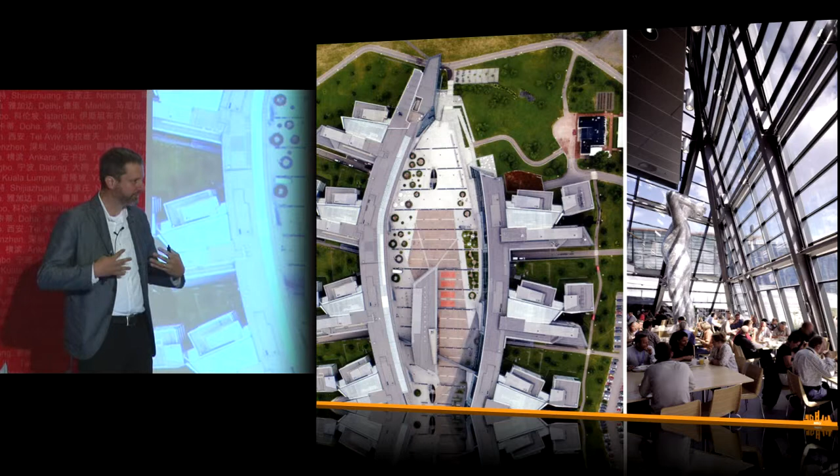This is another, which is actually mostly a research facility. And I show this simply because there was an idea of delaminating the program to even further compel people to interact. And researchers are hard folks to kind of get off of their desks or their cubicles or their screens to actually talk to one another. So we created a strategy, which I'll show you developed further in a high-rise, of basically pulling out all of the shared functions out of the building.

And the building on the left up there is the new one, on the right's the old one. Pulling out, this is in the UK, pulling out all the shared functions and putting them on the other side of a plaza and forcing people from the old building to the new building to cross that plaza to go have lunch, to have a conference, to work out, to simply hang out and to meet.

And what it's done, now that the building's in operation, is it has actually created this great sense of community interaction. So I just show those as examples of testing this idea of sort of magnetization and delamination of program to create sort of urban-like interaction. Just a few views of some of these zones in the seams between those delaminations where that sort of interaction starts to happen.

So now taking that idea and moving vertical, and I could talk about other points on the low rises, but to keep things moving along, the vertical. So the vertical city. This is a study we did also maybe 10 years ago, just thinking about the vertical city. We were hired to create a sort of mile-high tower before Adrian's and others have actually been built.

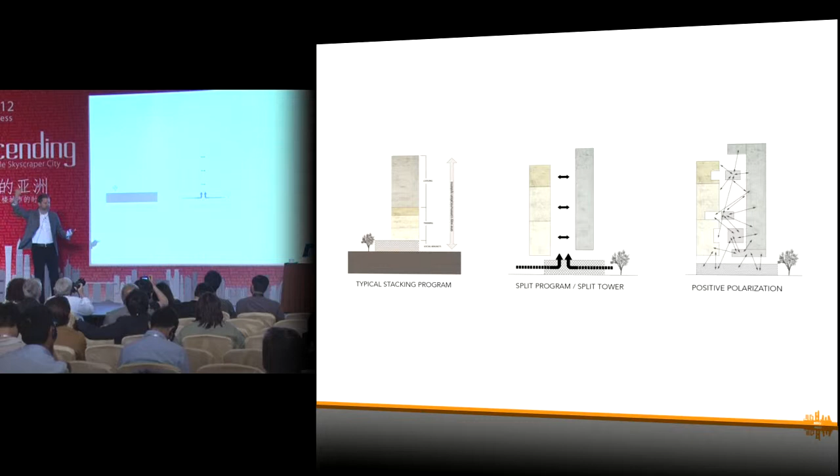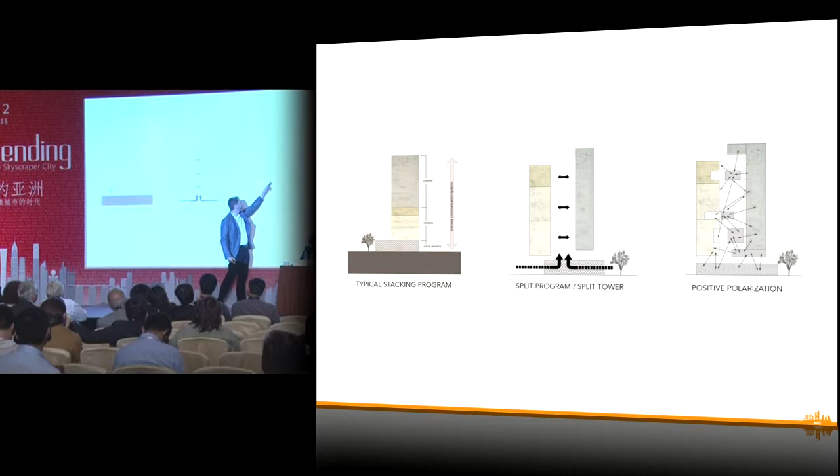So we took the ideas I showed you earlier, we split this thing apart, delaminated it this way, put the classrooms here, the dormitories there, and we kept the shared functions here, being practical people about getting goods and services and getting lots of people to move through. But then we took some of that stuff and we tossed it back up in between those two pieces. So those become these social magnets, similar to that Wellcome Trust project, but now it's vertical.

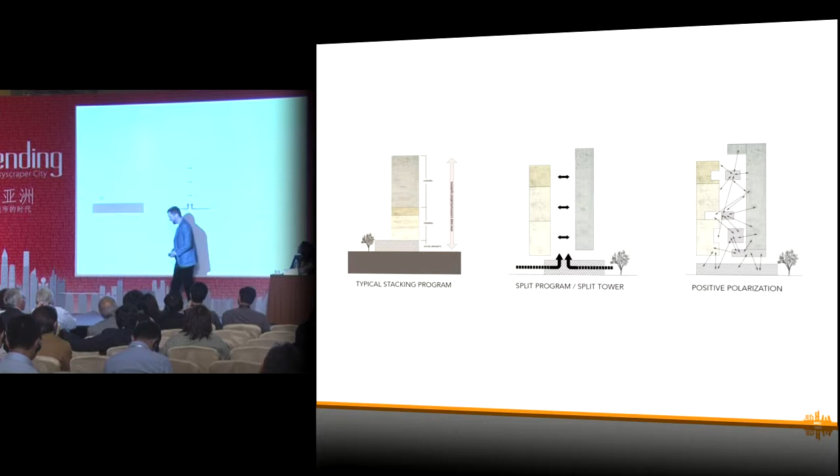So we've taken things that are all shared by the dormitories and the classrooms, and we've put them at junction points vertically in this tower. And that sort of positive polarization, in theory, because the building wasn't built, starts to create some sort of vertical urbanity to the project. And the idea of a vertical campus in a very dense situation where they didn't have the opportunity to go horizontal.

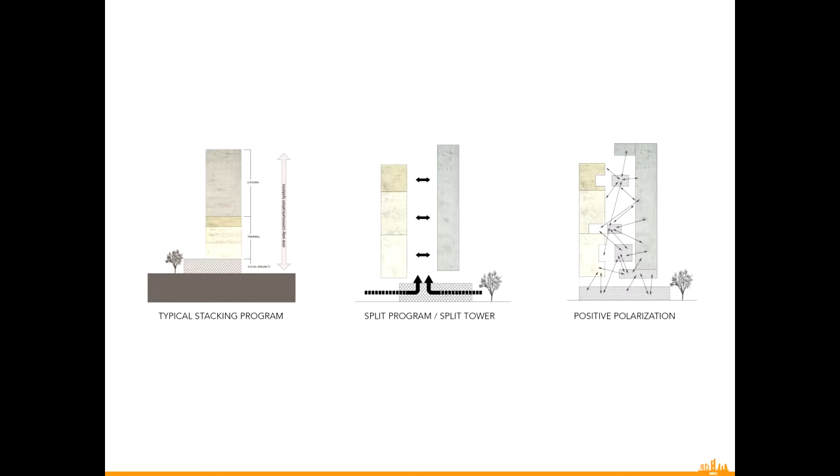This is more of just a quick sort of study on, it's a very beautiful building, a very simple building, on sort of user control and flexible systems. So taking the typical tower, it's just a box, a very beautiful, elegant box for NHN in Korea, the top search engine there. So typically you'd put the core in the middle and all the workplace around there. There's a lot of good reasons for doing that, and we do that a lot.

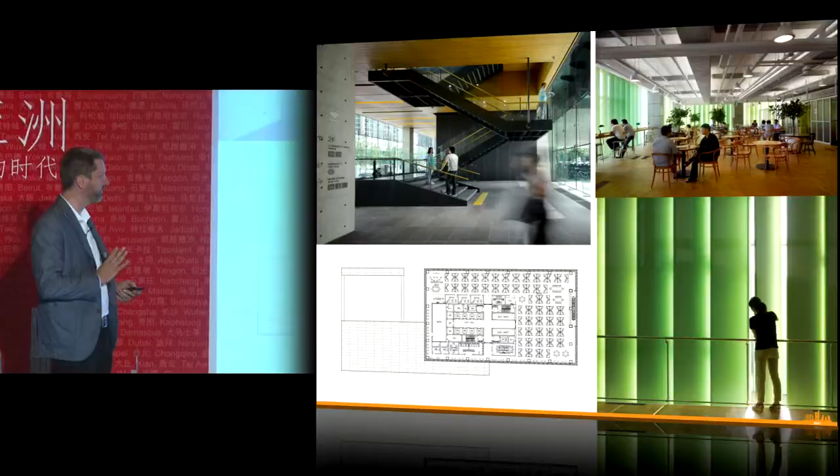And very simply, we just tried to, and this is done a million times as well, but we tried to move this off to the side, create 5-meter floor-to-floors on every level, and create a very flexible sort of warehouse-like space in the sky. Just testing ideas about flexible, adaptable systems. And that plugs into some of the ideas I talked about earlier. But at a very clean, kind of elementary level here, create beautiful architecture out of it. At the same time, though, creating user control.

So the entire facade of the building is wrapped by these green multicolored louvers that allows the programmers and the scripters and all the people who are creating their search engines to control daylight and control the expression of the building. So the expression of the building is talking about the people inside of it.

So moving on now to bigger projects. This is a headquarters for CHINATRUST Bank in Taipei. So here we, I think, tentatively push the ideas a little bit further of the delamination and the polarization of program to create the positive interaction. It's a headquarters tower. These two towers are both part of the headquarters and a hotel, and a retail podium at the base. It's on the edge of Taipei, looking back to Taipei 101. It's under construction, as you can see at the base.

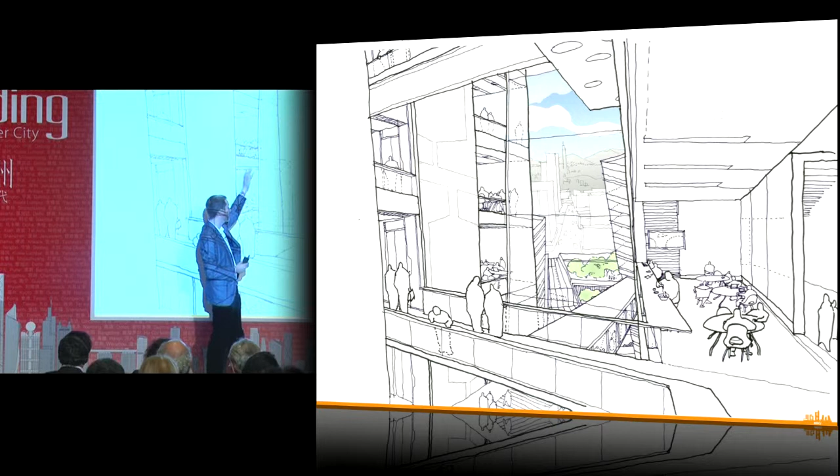Conceptually, we tried to create this experience. All these things that we accomplished at the low scale on Telenor and other projects, trying to fold that up vertically into a series of not just atriums for the sake of an atrium with some trees and some nice sky lobby situations, but actually these series of pocket parks almost that have cafes, that have meeting facilities, that have lobbies, that have different things. And we broke them into smaller chunks. But we just started to tentatively delaminate the building to create that kind of experience.

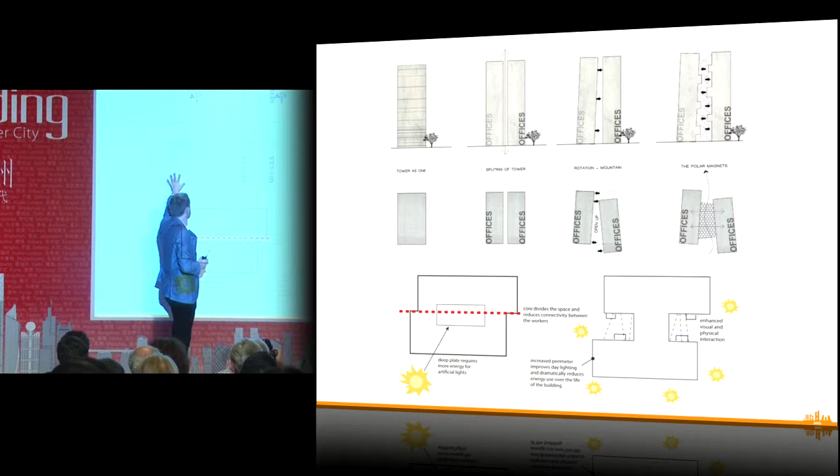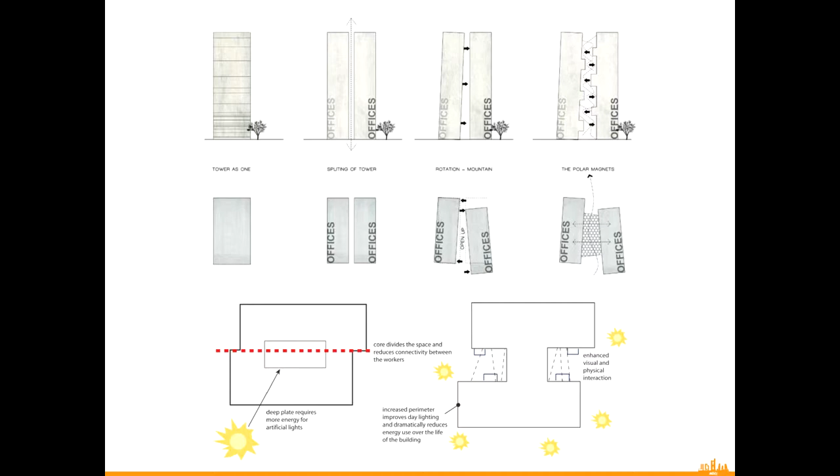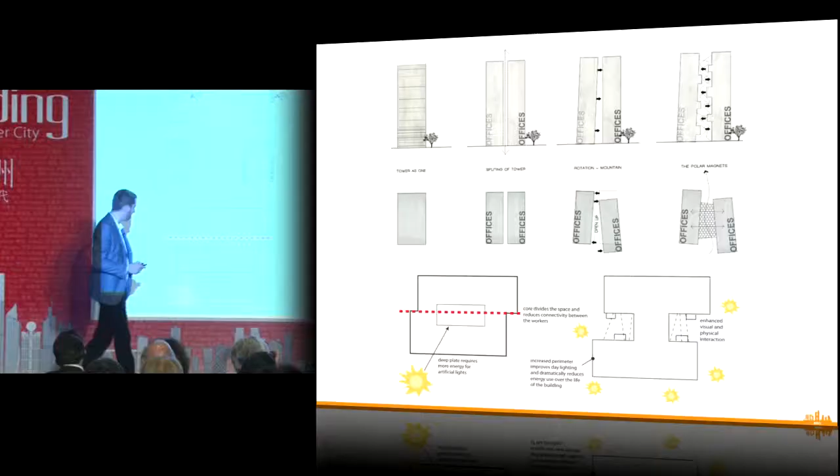And you can see here in the plan, taking the typical tower, splitting it, cracking it open, and then creating these zones in those interstitial spaces that become those vertical plazas. And they have meeting spaces, lobbies, some shared functions, and then all the offices are here looking into them. Key point, visual and physical communication, but also real program activity happening in there. So that's the idea of the CHINATRUST project.

Taking it a step, because blowing the whole thing open is a little bit hard on some of these projects. A view of the project. This should be done sometime in the next year or so. They've topped off the steel. The skin is starting to go on it.

And then one other project is the Korean Telecom. This one is not being built, but this is the headquarters for KT that we competed for. And we took the idea that I outlined in CHINATRUST, and rather than stacking a series of these spaces, we started to create an unwound street that goes up through the entire building. Again, to promote visual and physical communication and to force some sort of overlap of people to actually trade ideas, think about things differently, and get people out of their seats and into an urban environment.

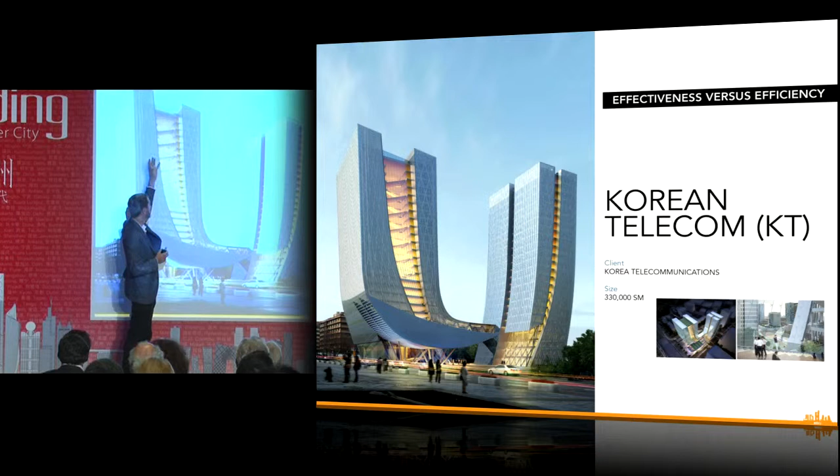And the challenge with all these things I'm showing you is, I think where we still lack the real connection is, there's still all the fun stuff happening here. We're trying to deconstruct the tower within to open up the vertical communication and the urban conditions. But how do we put those two things together? That's still the big question.

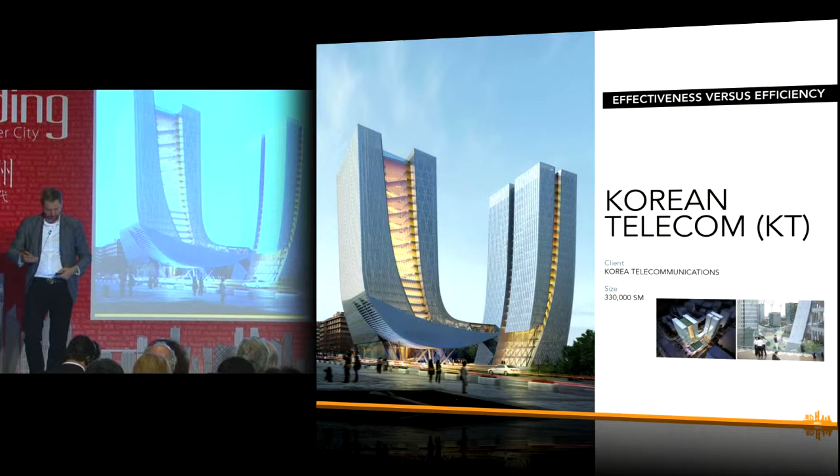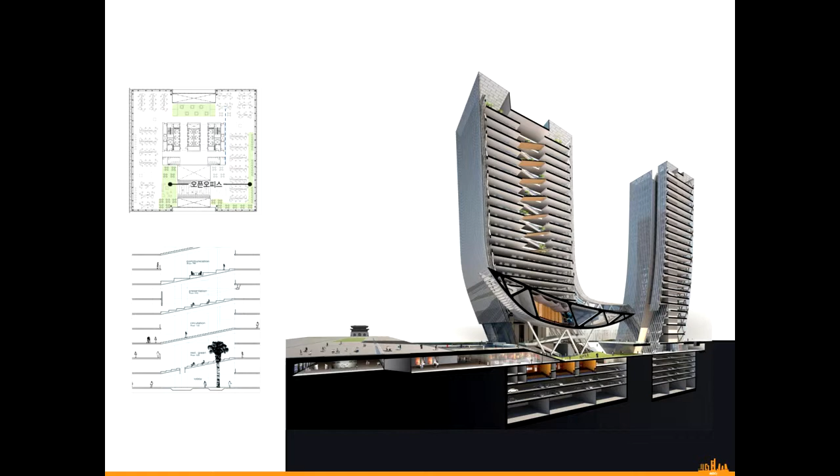Here, at any rate, you can see this idea of this street, which starts to go up through the entire building on each side of it as we pull apart and delaminate the two structures. And the kind of character that creates, allowing maximum visual connection from the workplace back into these plazas and these steps and stairs and spaces and auditoriums that go up through the building.

So with that, we were able to take those ideas and bring them to the next level on the Tencent headquarters. And still, one step down the road, there's probably 20, 30 to go on this idea. But this was an opportunity to create truly and build truly a vertical campus / city for Tencent. And I'd really say campus because it's for them. It's not yet for the city, so that's the next step.

But this is a 54-story tower on one side, 48-story tower on the other side. And it's headquarters for Tencent. So for those who don't know, that's the third largest internet company in the world, behind Google and Amazon. So that's pretty staggering, but it's all within doing business mostly within China, because the market in China is huge. It's a very young company.

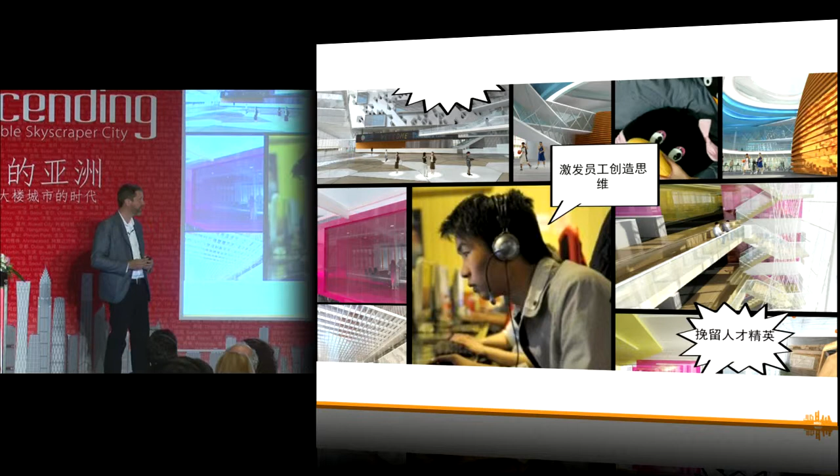It's growing like crazy. They do everything on the internet from blogging and instant messaging to games to all those sorts of things. So it's about this new generation. It's about the information economy. It's about all of those things I talked about earlier, which is interesting. And to capture the energy of Tencent, and for those who know Tencent, probably everybody here who's from China has a QQ account, I suspect. And to capture that energy into the building was our first challenge.

And to understand that the people inside the building making products and services and the people in China are the same people, which is interesting. They're all about 30 years old at the most. So to understand the people that are going to be inside the building, and how does that reflect in a strategy for reforming the tower. And there's a lot of images, like this is their mascot and the mascot's girlfriend, I suppose. And this idea of communication and connectivity, which is what their business is about, but also can we then reflect that somehow in the tower?

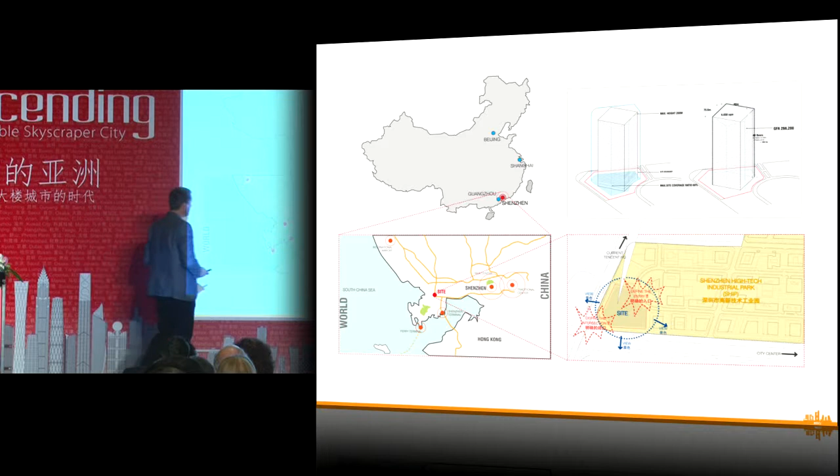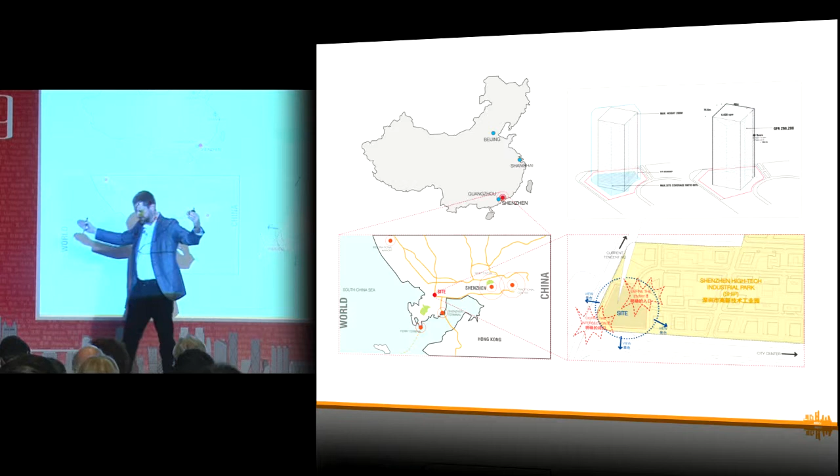Can we create some sort of tower which is taking the ideas I talked about earlier, rethinking the vertical proposition, and basically being all about communication in all directions. So not communication just like this, but starting to become almost like a cloud communication. The site is in Shenzhen, one of the largest, fastest growing cities in the world. They had a massive FAR, which allowed for 7,000 square meters per floor plate on this site. That seemed a little bit dramatic and massive. So using the inspiration of Tencent and connectivity, we split the mass into two pieces.

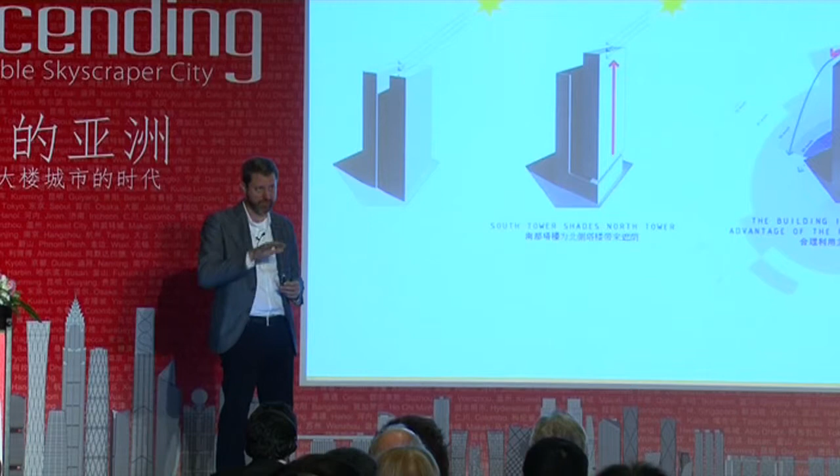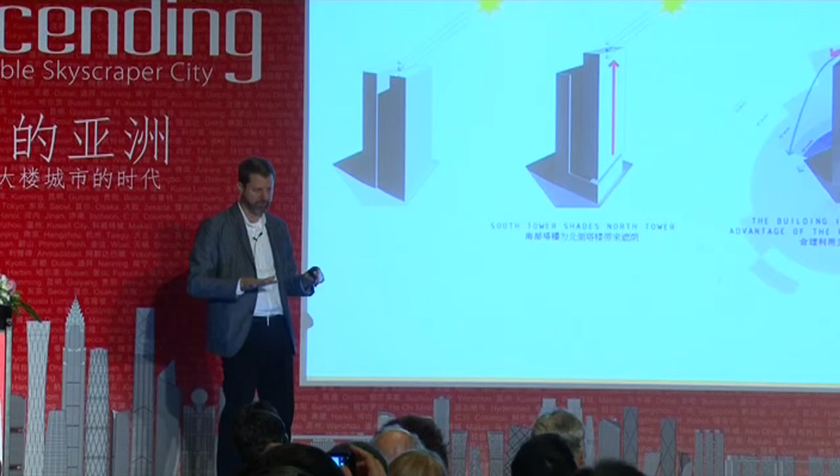And at the same time examining the site, because we wanted to take a strategy which says, because the technology for reducing energy is still very expensive, we wanted to make sure we do everything with the building we can to reduce the impact of the sun and the wind, and reduce the energy consumption. We had a 30% reduction goal on this one. So we faced these two masses south, lifted up the south tower to shade the north tower, and reduced as much as possible of the south, east, and west. The east and west is the narrow, the south is the broad.

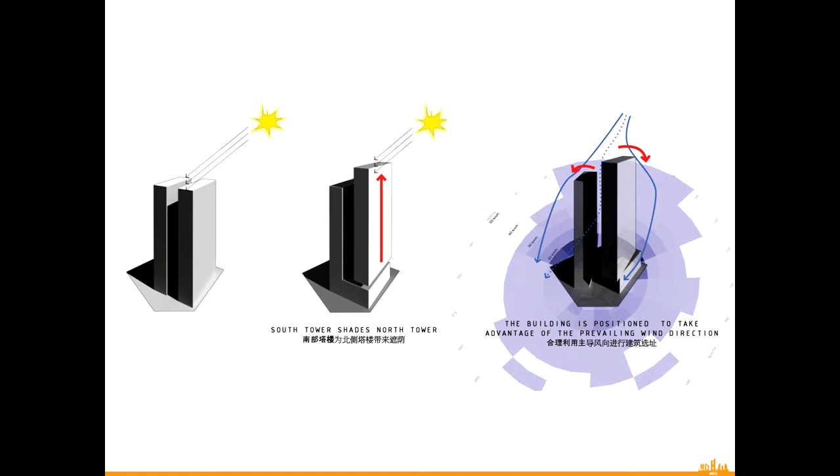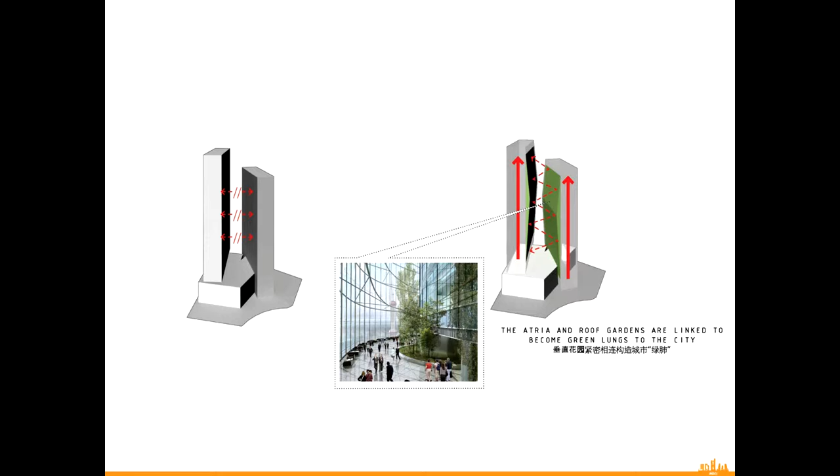And then we opened it up to capture the prevailing winds. So we did several key steps to accomplish that goal just with the massing. And that played a huge role in reducing energy consumption in the project. And then by splitting them open, you start creating this visual communication I talked about. So everybody in the north tower and south tower can see each other, and they can connect to each other. So then how do we connect them? If they want to see each other, we really need to bring them together.

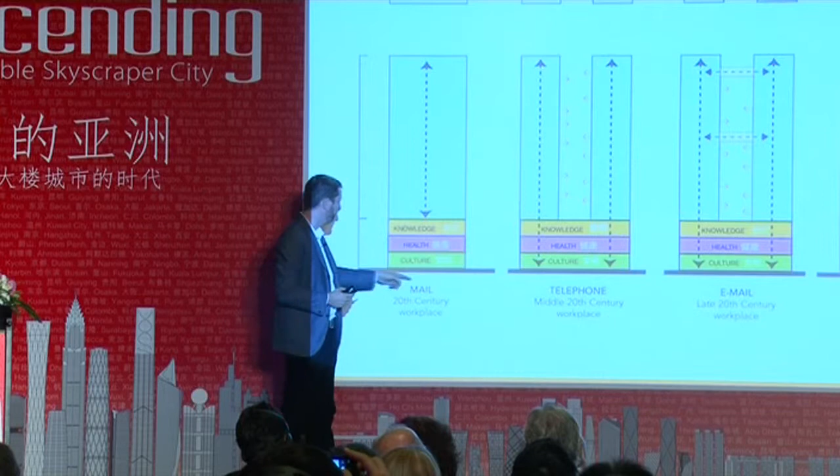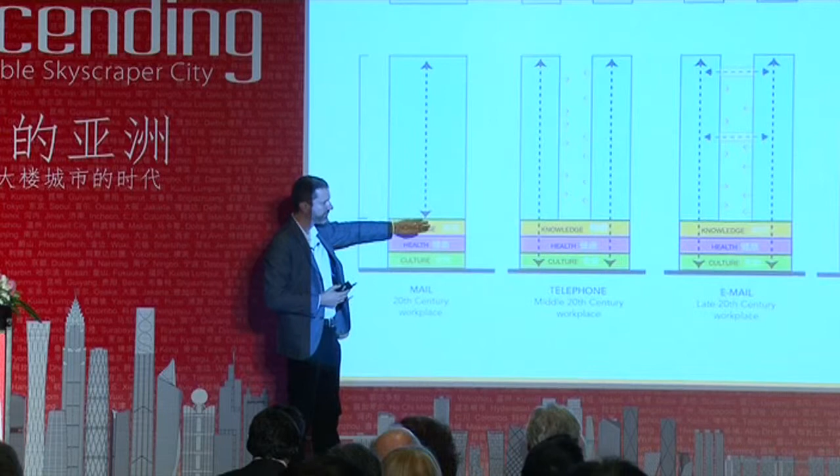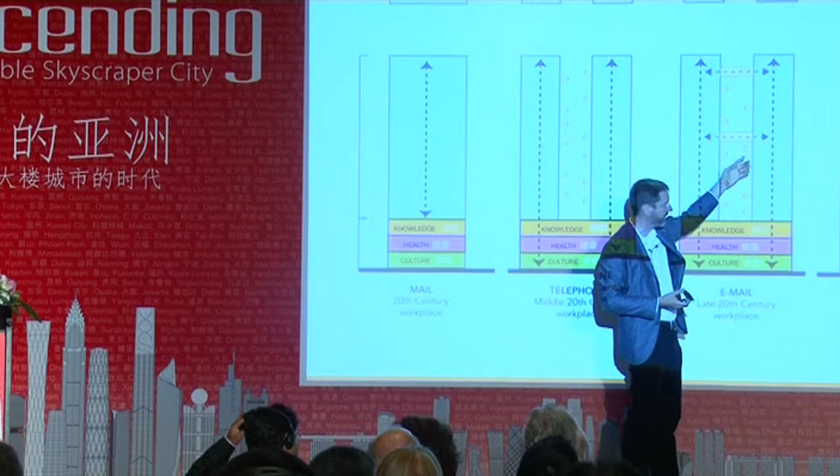The program called for a whole bunch of pretty extensive stuff that they want to have as amenities for their employees. Cultural things, health and fitness things, and knowledge-related things. So we split this tower. We've still got all these things at the bottom. We could put some little tentative bridges like we had in Chinatrust, which are nice, but they're not really meaningful, frankly. So we took all that program and we pushed it up into the tower, into these three bridges.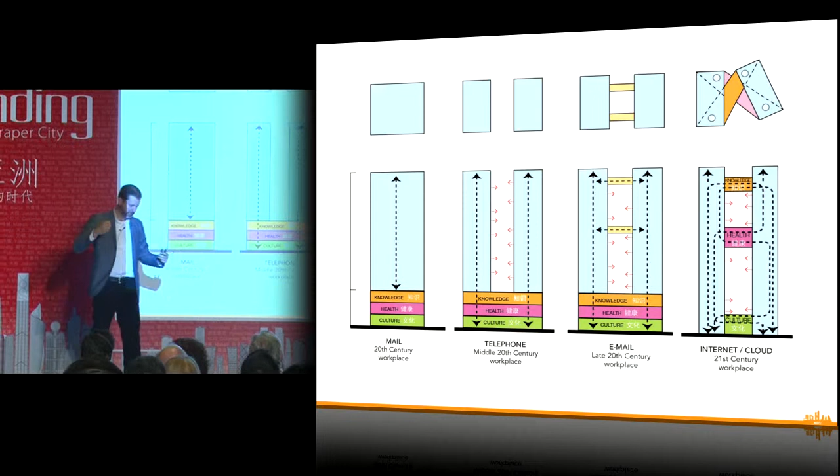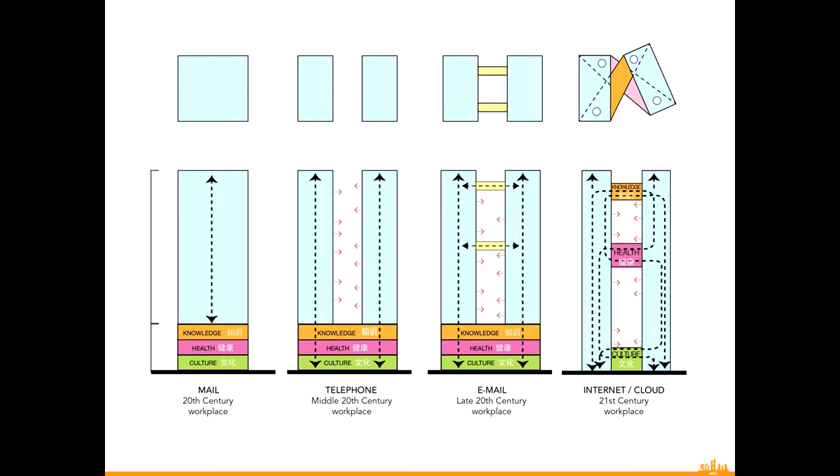Those three bridges have real purpose in that they are the shared functions that bind the company together. And they create real sort of urban spaces, urban meaning within a campus context in the tower. And it also allows the opportunity to change movement from being purely vertical to suddenly being cloud-like. So you can start moving through this tower in any way that you please. Now, to do that, of course, we have to engineer it quite carefully, but the effect is this vertical campus idea, taking the campus and moving it upwards.

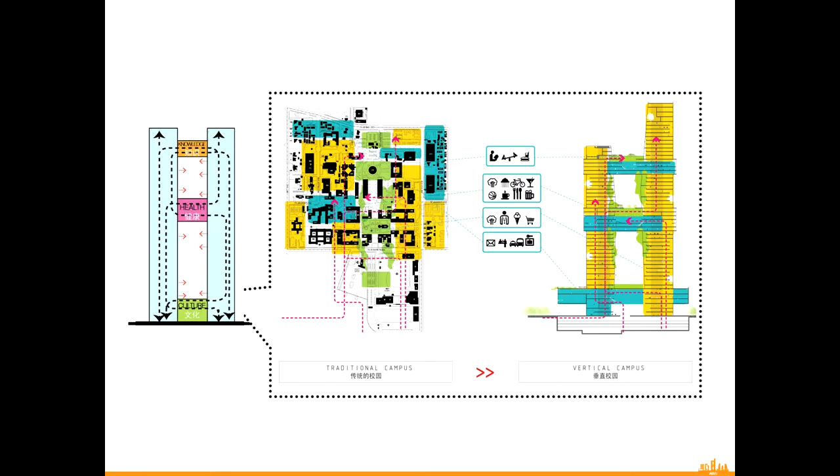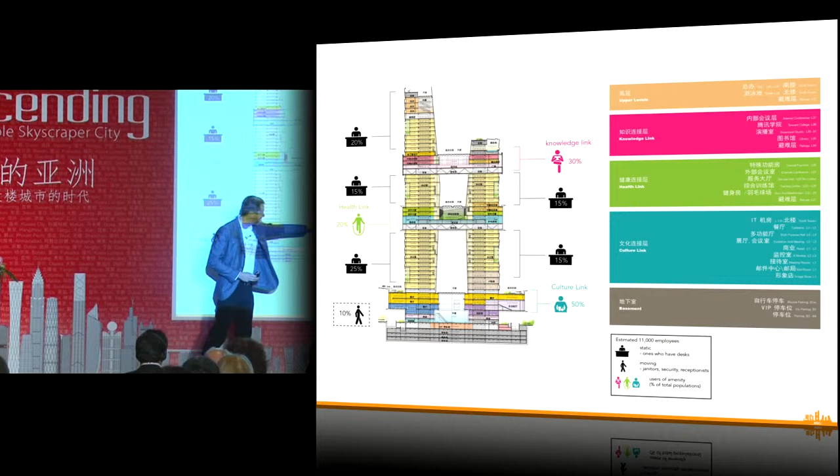In Shenzhen, land is expensive. Tencent had no way of doing a real campus, which is what they wanted to do. So we created a real vertical campus for them. And these three links: this culture link, which has all of the dining facilities, the Tencent Museum, the expo, the auditorium, some of which are shared and used by the outside of the city, and some of which is used just by the employees. So this is the cultural link.

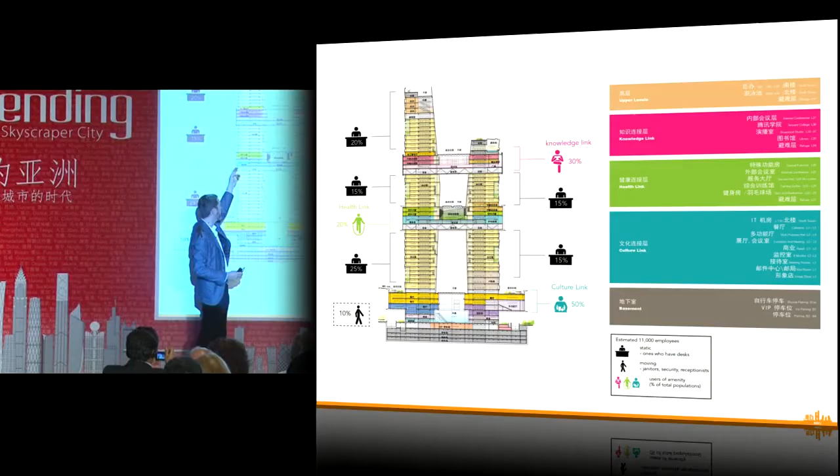The health link has a full-scale basketball court, fitness center, and all those sorts of things in the middle. And then the knowledge link has Tencent University, meeting rooms, library, and those kind of things. We had to engineer a vertical transportation system which takes advantage of these links to allow people to quickly get up into the building, but also allow people the opportunity to stop, cross over, meet people from the north tower, go up to the top, circle back down again on the other tower. So it becomes a subway map in a way.

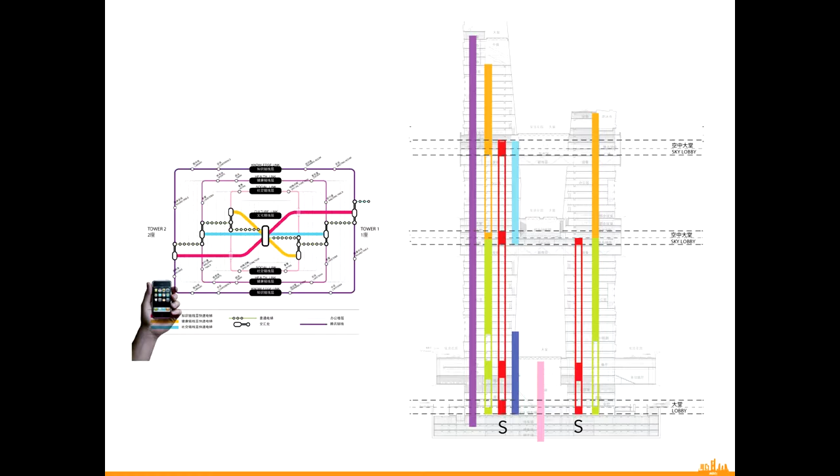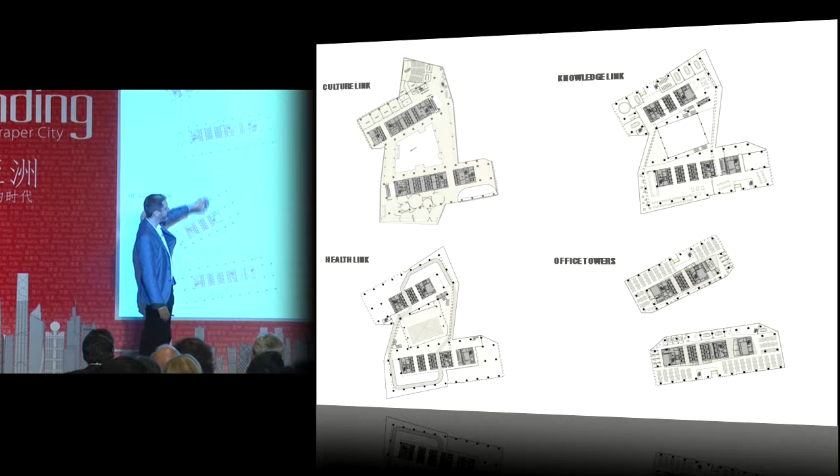And I think Rafael Viñoly talked about that yesterday, the idea of the subway becoming the vertical subway. And this is, I think, an opportunity to start testing that idea and seeing if we can make it happen. Obviously, the configuration each time one of these links ties into these office buildings changes the condition and changes based on program and function as well. And as you go up from the lobby, you can see puncturing through that first culture link above you and looking out to the city. So you understand the Tencent campus above you, and you understand your connection to the city beyond.

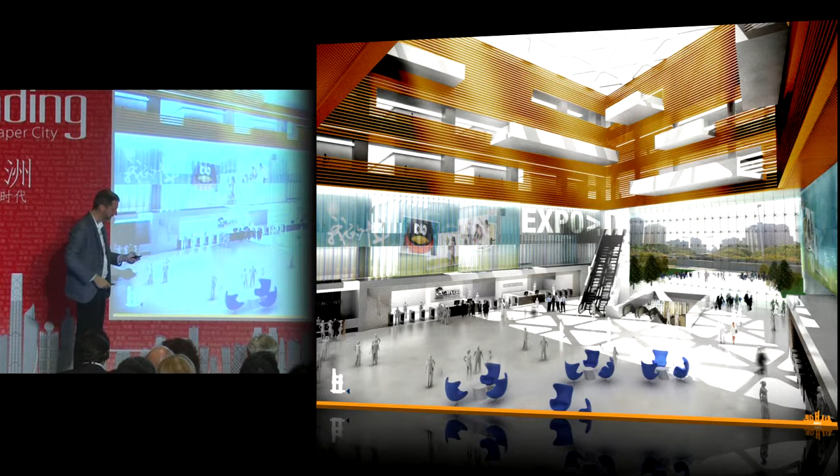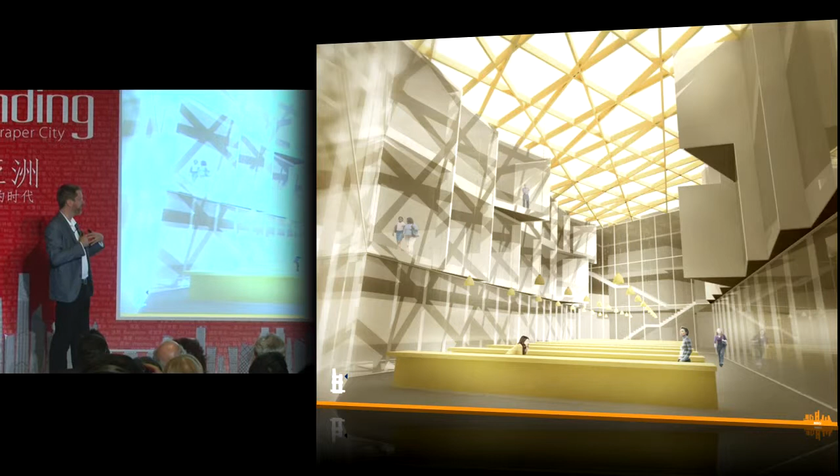The museum for Tencent. Going up to the middle, which is the health, the heart of the tower, is this basketball club surrounded by all sorts of fitness activities. And at the very top is the reading room, the library, the sort of knowledge center for the whole thing at the top of the tower. It's calmer, it's quieter, it's a place for measured interaction in meetings and in knowledge sharing.

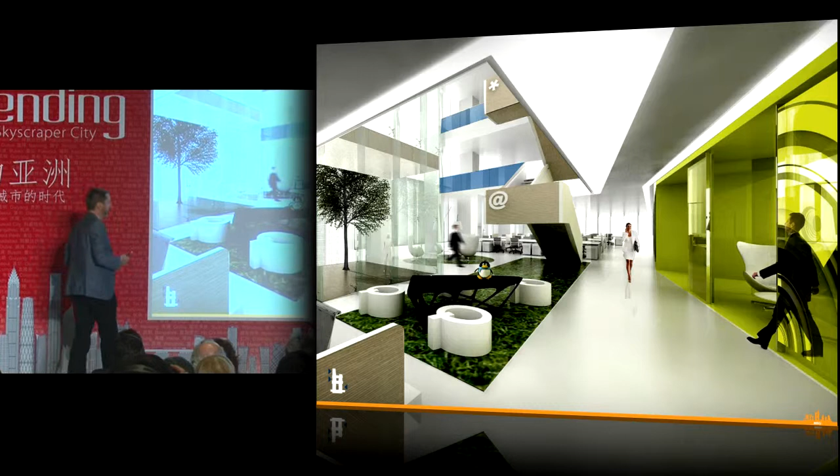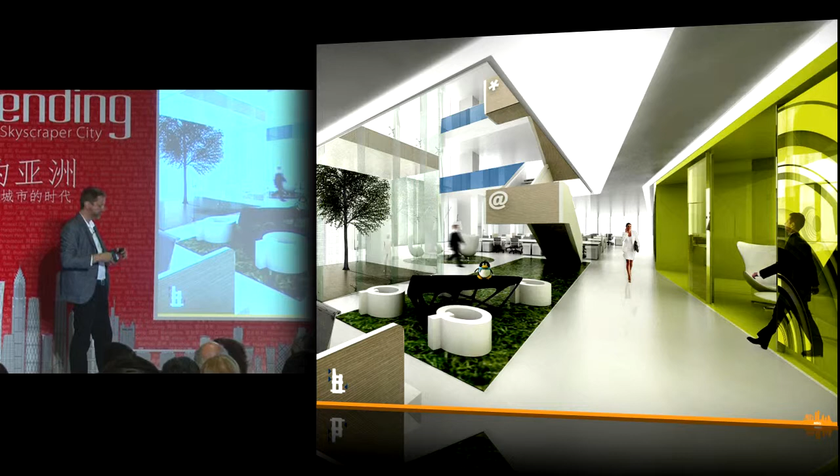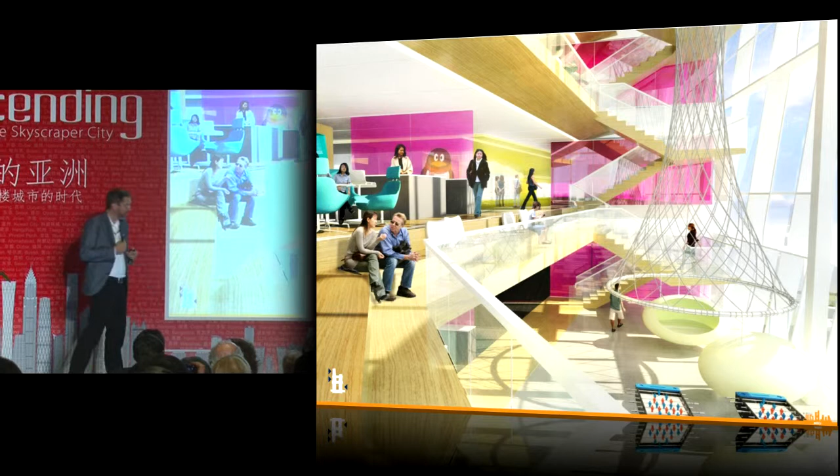And then the typical offices, we tried to also puncture these endless plates throughout the office buildings with a series of connected stairs, with a series of 3-story spaces which link the whole tower together, allowing different groups to talk to each other visually and physically, as I talked about earlier. Some of the spaces are more elaborate, and they utilize the view to the outside. Some of them are more embedded and focused, and that's the character of the space.

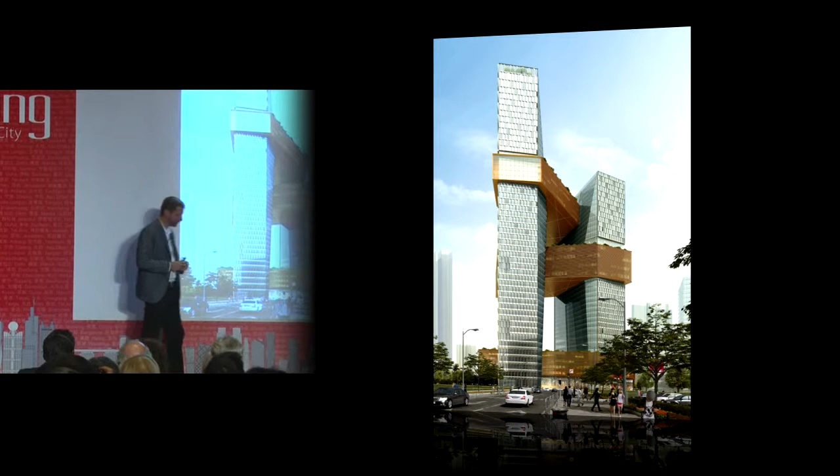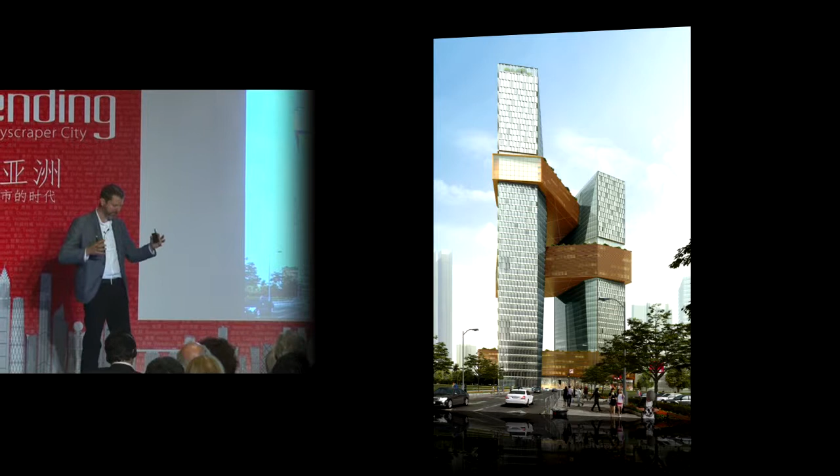So one last point. I know my time is up based on that last card. So when we move back outside, these 3 links that tie these 2 towers together, the self-shading on the masses was then taken to the skin itself. So the skin, which represents this idea of a cloud of information wrapping around these 2 towers, is actually doing something to further self-shade the building.

So in the south, all these sawtooths are leaning out, blocking the sun. On the east and the west, they're all tilting this way and that way to block the sun. Actually, the north too, because the sun curls around to the north side. So those measures express the power of the tower, but they also start to reduce the energy consumption. We got pretty close to our target with those major massing and skin moves that we made. And then we expressed the idea of the vertical campus.

So that's what I have. I think there's obviously a long way to go with this idea, and it's full of a lot of potential. It could be, as I said, something scary or something very powerful and positive for humanity. So I think that's the debate to have.